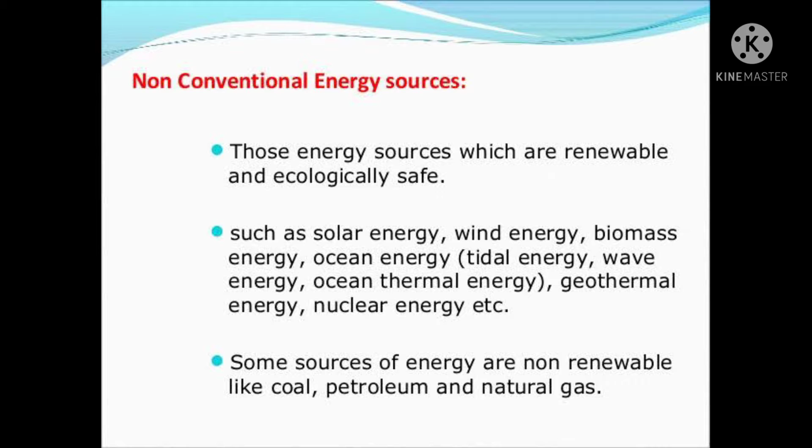Non-conventional resources. Let us learn about solar energy.

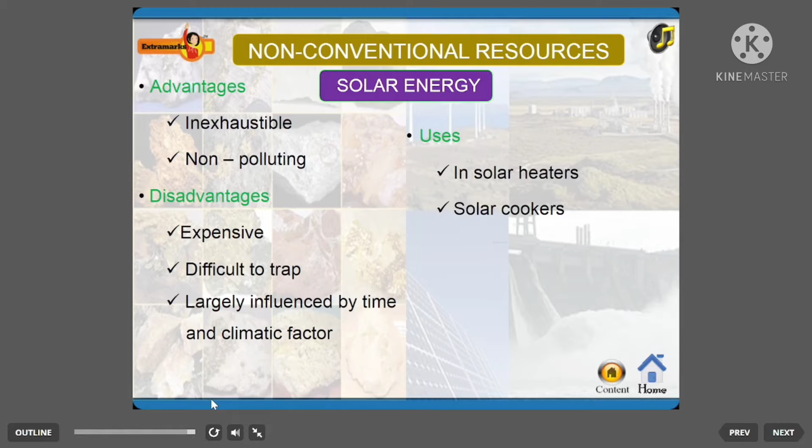The advantages of solar energy are: it is inexhaustible and non-polluting. The disadvantages are: it is expensive, difficult to trap, and largely influenced by time and climatic factors. Its uses include solar heaters, solar cookers, solar dryers, community lighting, and traffic signals.

Let us know about the generation of solar energy through the following animation.

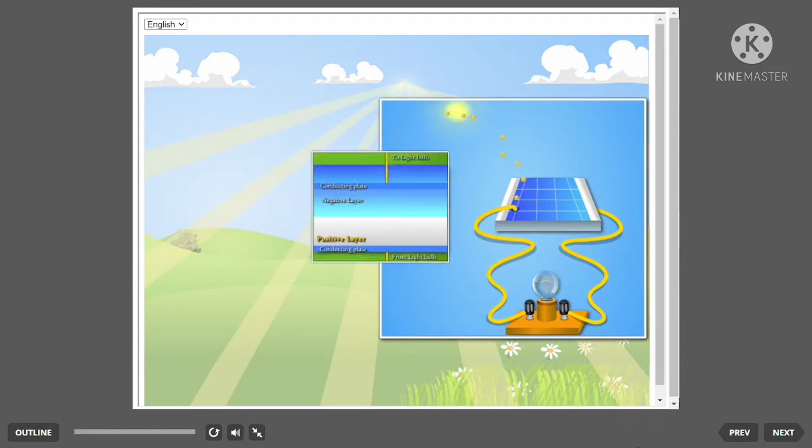Solar energy is the energy received from the sun in the form of heat and light. It has been harnessed by humans since ancient times using a range of ever-evolving technology. Solar power generates electricity by means of photovoltaic cells. Solar technologies are broadly characterized as passive and active, depending upon the way they capture, convert, and distribute the sunlight.

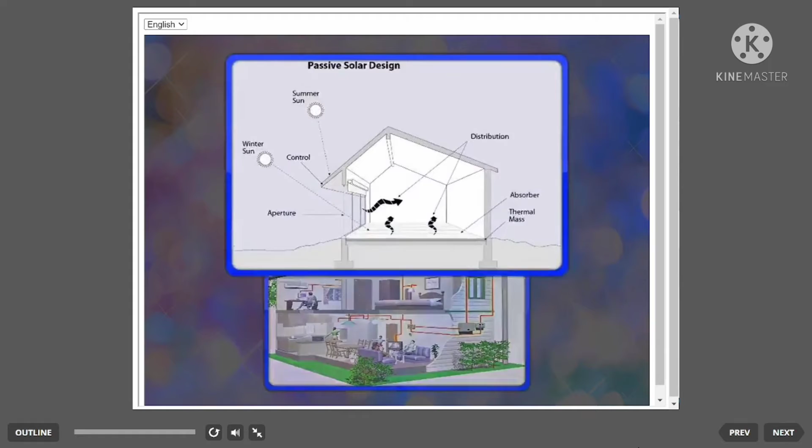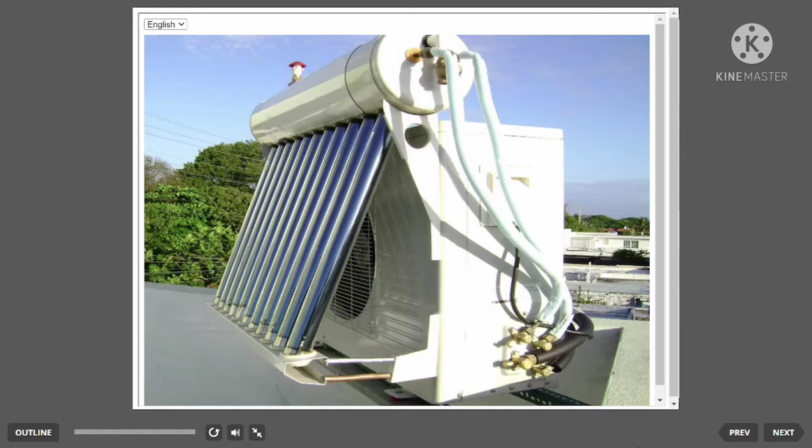Active solar energy technique includes the use of photovoltaic panels and thermal collectors to convert energy. Passive solar technique includes selecting material with suitable thermal properties, designing spaces to circulate air naturally, and orienting a building to trap light and heat from the sun to maximum. Solar energy can be used for various purposes like cooking, power and electricity generation, and transport.

Wind energy. Let us learn about wind energy now.

The advantages of wind energy are that it is non-polluting, a renewable resource, and safe, while the disadvantages are: it creates noise pollution and it disturbs radio and TV signals. The leading producers are Netherlands, Germany, USA, Denmark, and United Kingdom. Uses of wind energy are: it is used for grinding grain, lifting water, and to produce electricity.

Let us know more about wind energy through the following animation.

Wind energy. Wind is a non-conventional, clean, and safe alternative source of energy. It is the kinetic energy associated with the movement of atmospheric air. Windmills are used to harness wind energy for various purposes. Principally, a windmill turbine draws upon the force of fast-blowing wind to generate electricity by rotating propeller-like blades around a rotor.

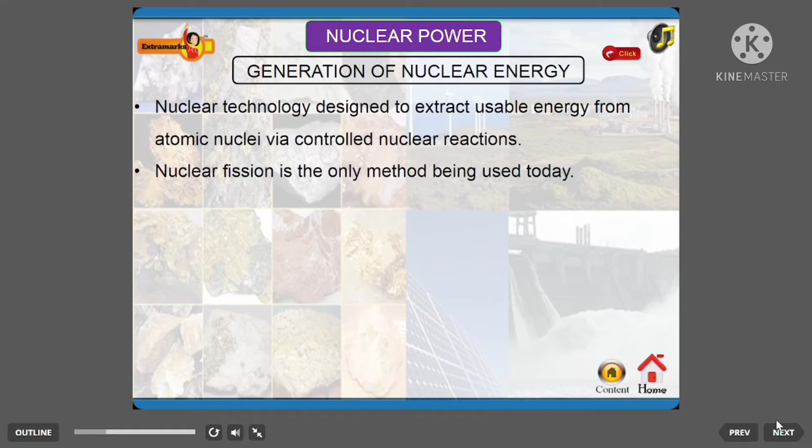Let us learn about the generation of nuclear energy. Nuclear technology is designed to extract usable energy from atomic nuclei via controlled nuclear reactions. Nuclear fission is the only method being used today. Other methods might one day include nuclear fusion and radioactive decay.

All utility-scale reactors heat water to produce steam, which is converted into mechanical work for the purpose of generating electricity or propulsion.

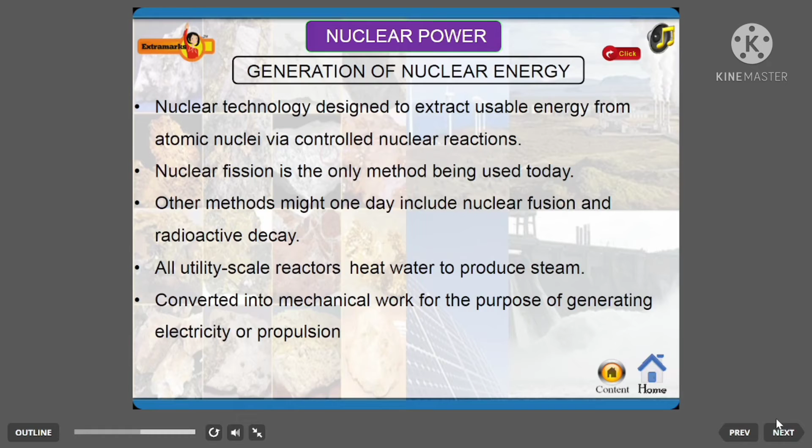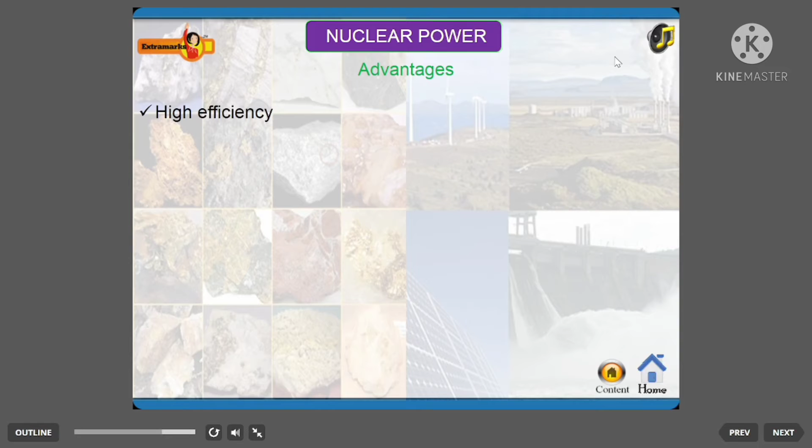Nuclear power. Let us know about the advantages and disadvantages of nuclear power. The advantages are that it is highly efficient and it is a potential source of energy.

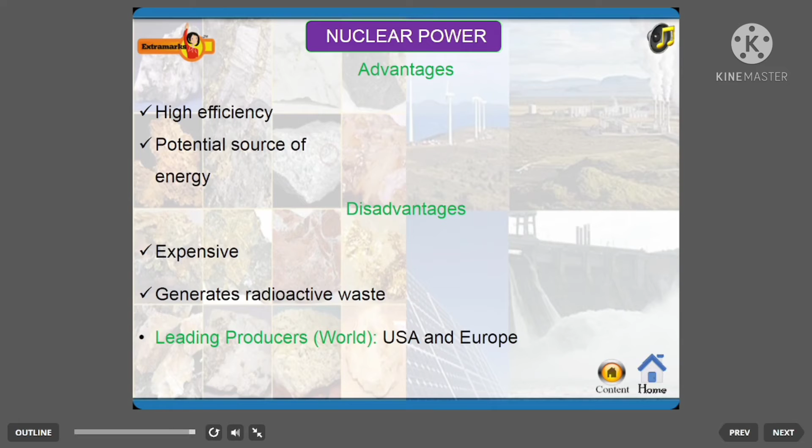Disadvantages include it is expensive and it generates radioactive waste. The leading producers of nuclear energy in the world are USA and Europe. In India, it is produced in Tamil Nadu, Maharashtra, Rajasthan, and Karnataka.

Another important source of energy is geothermal energy. It gives us a steady supply of electrical power with minimal environmental impact. Geothermal power plants use superheated fluids from the Earth's geothermal resources to generate electricity. This heat comes from molten rock magma.

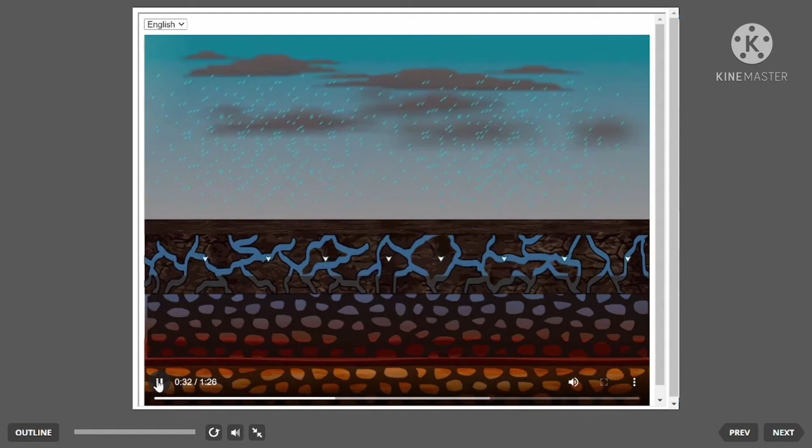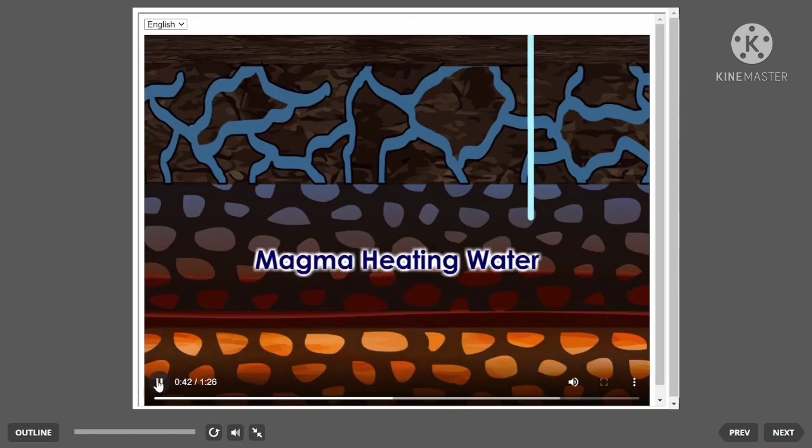Over thousands of years, rainwater seeps through cracks in the Earth's surface and collects in underground reservoirs. The magma heats the water until it becomes a superheated fluid. To reach the superheated fluid, wells are drilled 5,000 to 10,000 feet below the surface of the Earth.

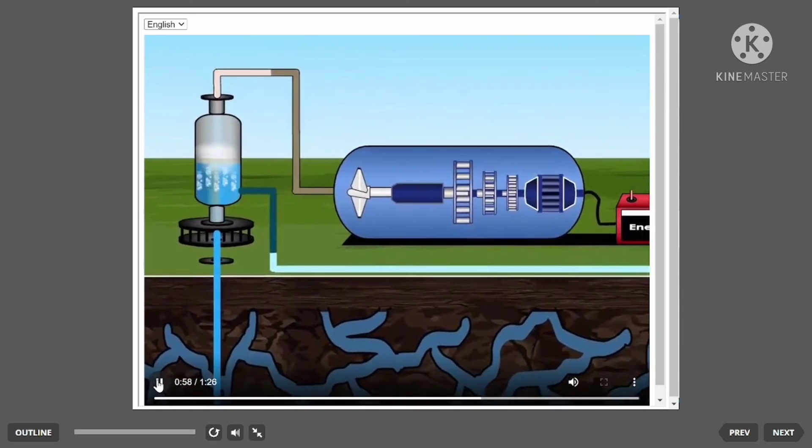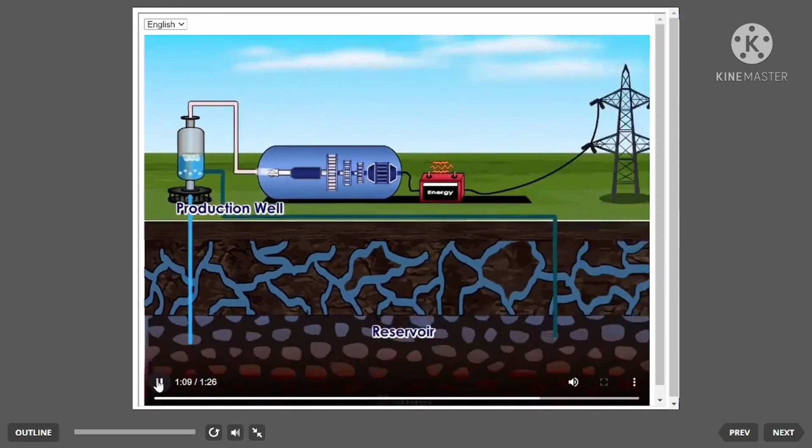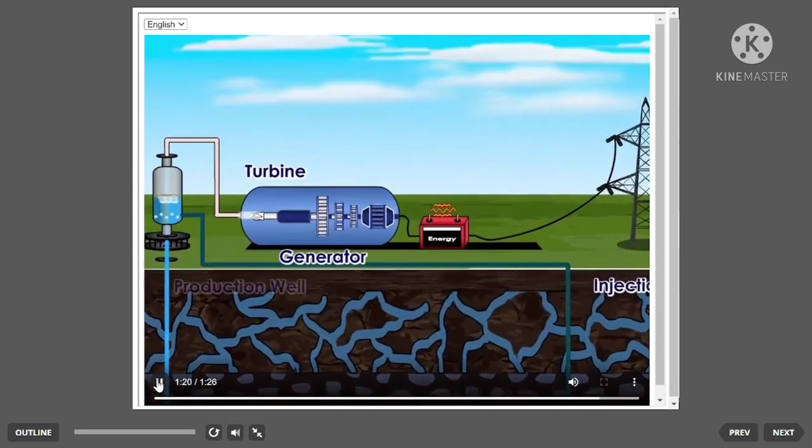Under its own pressure, superheated fluid from the geothermal resource flows naturally to the surface through a production well. The geothermal fluid is converted into steam. All remaining geothermal fluids are injected back into the reservoir for reuse. The steam is used to drive a turbine and generate electricity for homes and businesses.

Tidal energy. The advantages of tidal energy are it is inexhaustible and non-polluting, while the disadvantages are it influences aquatic life and it is difficult to harness. It is used for producing electricity. Leading producers in the world are Russia and France. In India, tidal energy is produced in the Gulf of Kutch in Gujarat.

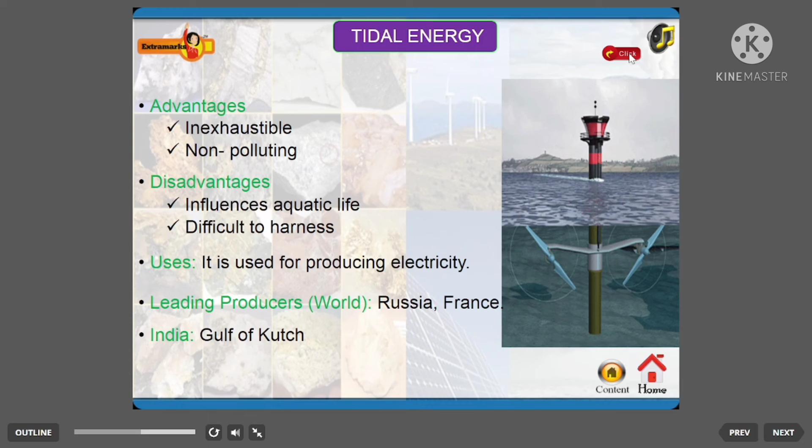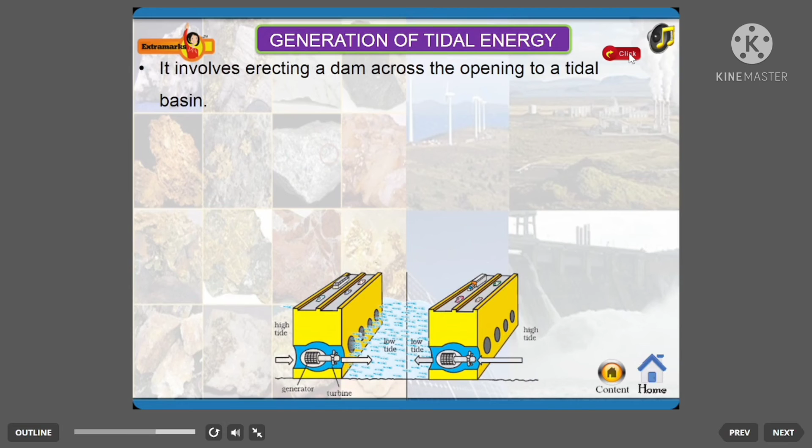Generation of tidal energy involves erecting a dam across the opening to a tidal basin. Tidal electricity generation involves the construction of a barrage across the estuary to block the incoming and outgoing tide. The head of water is then used to drive turbines to generate electricity, similar to hydroelectric dams.

Let us know more about biogas through the following animation.

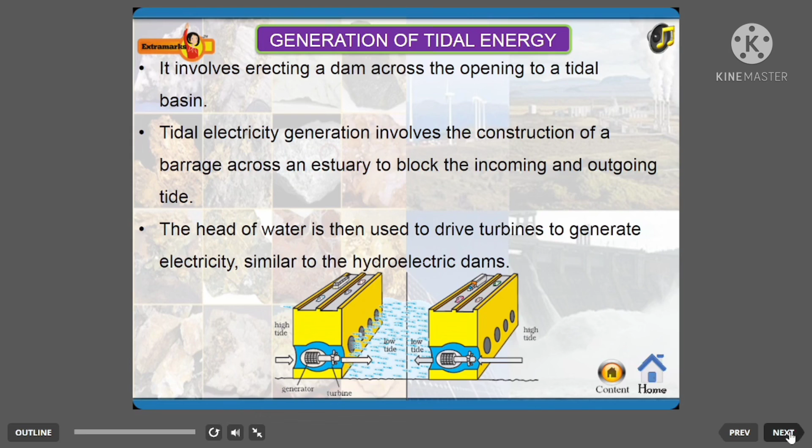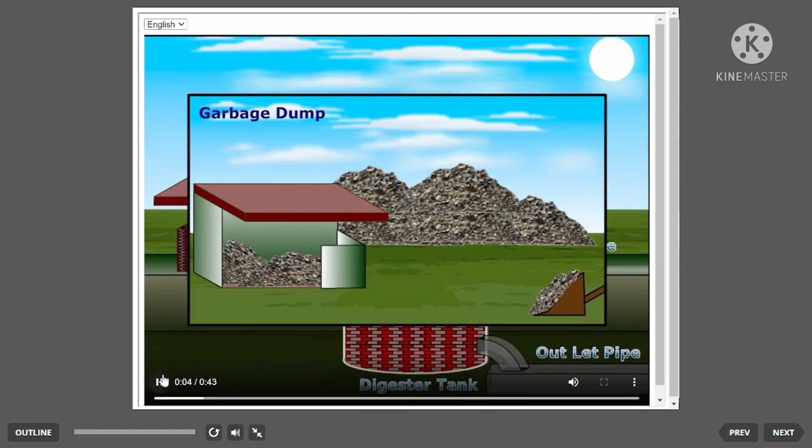Biogas. Biodegradable materials like dead plants, dead animals, kitchen wastes, and other organic wastes can be collected and used for making biogas. The collected waste material is fed into a digester tank where it is broken down into simpler material by bacteria in the absence of oxygen.

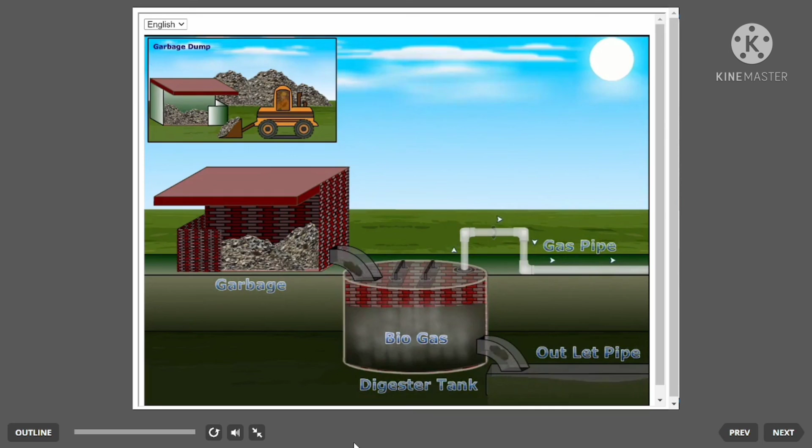Biogas comprises methane and carbon dioxide. It is an excellent, clean, and renewable energy resource for domestic purposes like cooking, power, and electricity.